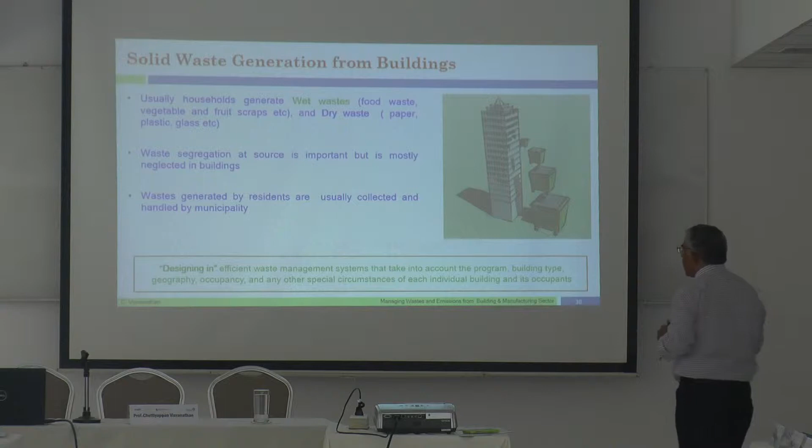Garbage, the amount of solid waste produced becomes a big issue, especially when the buildings become vertical. You need to be careful how you segregate the waste, which are done as wet and dry waste approaches. Please understand, any solid waste management system, if you want to address the issues,

the heart of the system is the segregation. That means you need to segregate in your building, and the way you do it differs from the types of buildings.

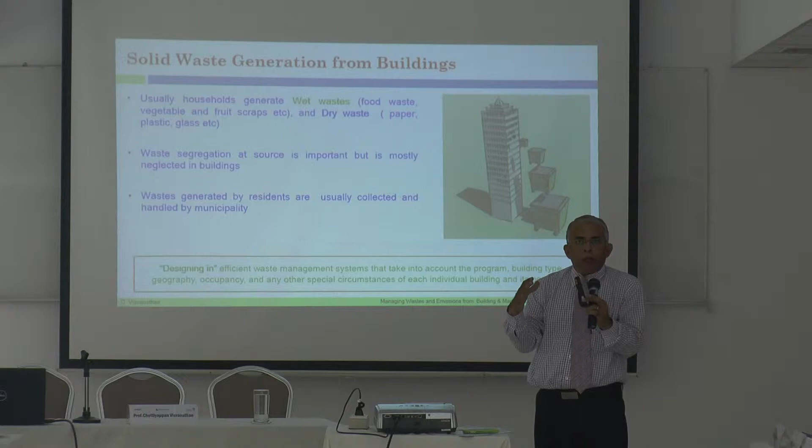It's much easier if you have a lot of space in a big apartment or a big house. But when the apartment size becomes smaller and smaller, how do you do the segregation? That has to be looked into very carefully. That is what we call designing in effective and efficient management system.

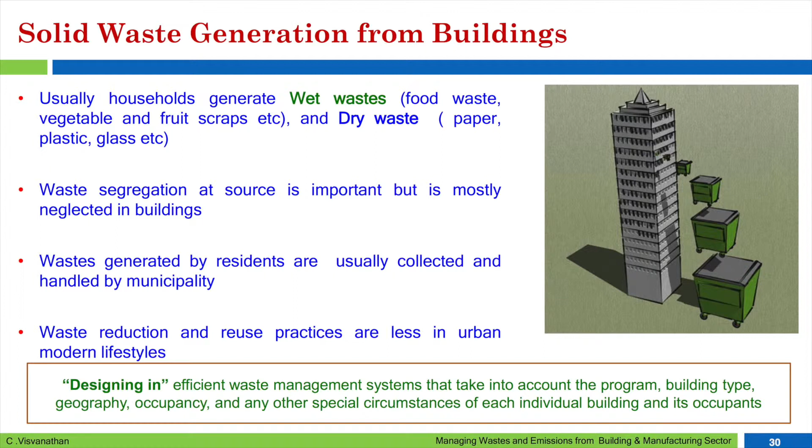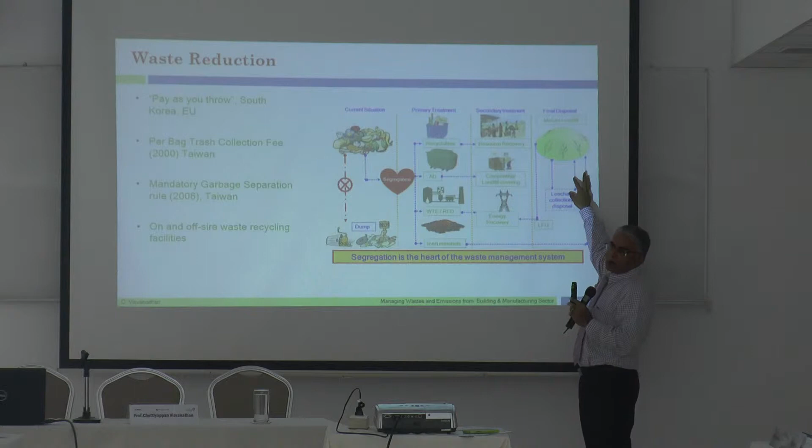It needs to take into account the program, the building type, where it's located, what is the occupancy, and all these things have to be looked into very carefully in designing it. Any system you're going to use for treatment of solid waste, the heart of the system is the segregation.

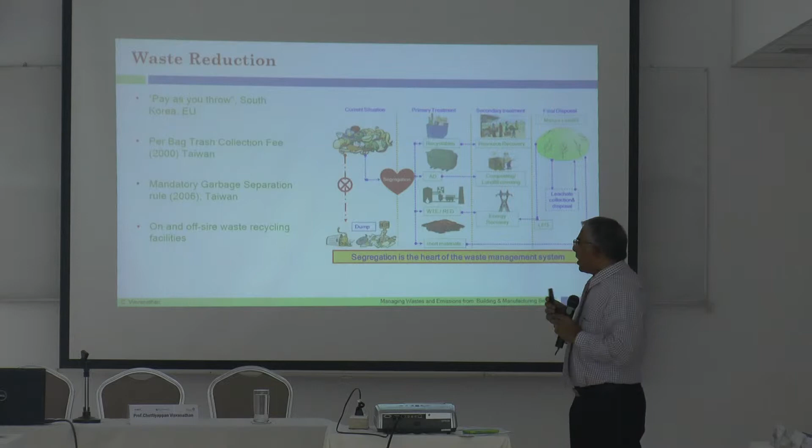The segregation has to happen at the building site. You need to plan right in the beginning. But there are a lot of successful case studies. Sorry, I don't have time. Maybe later on, if you have time, we can discuss a little bit about it.

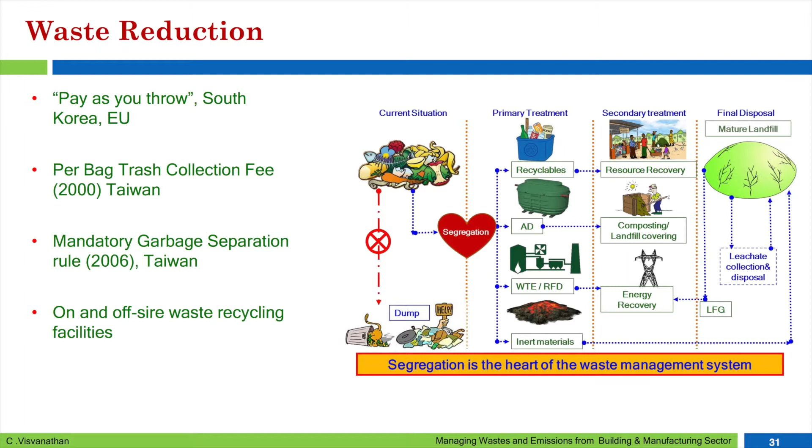Let's say, for example, South Korea and the European Union have introduced pay-as-you-throw. That means however much waste you are generating, you pay for that. That means you start with a segregated system at the apartment, at the building level.

Per bag trash collection in Taiwan, same type of system. You pay based on the amount of waste you generate. That means again you need to sort of segregate your waste now.

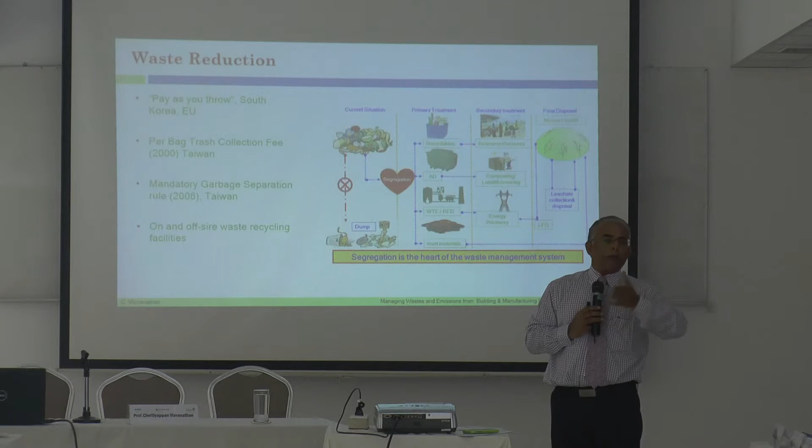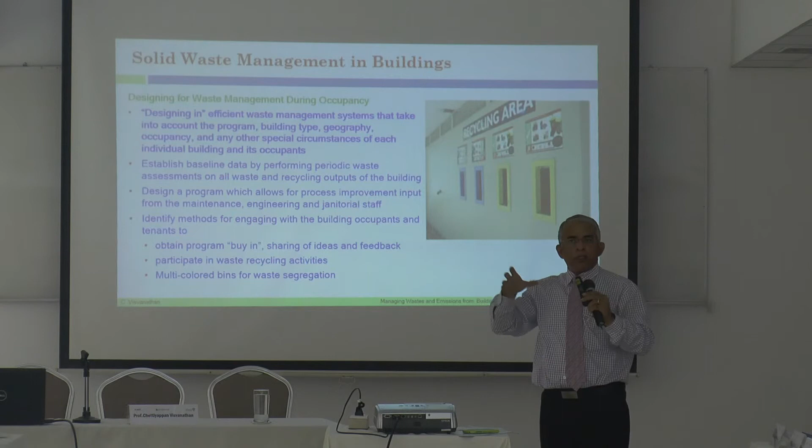Most important thing, when you do segregation, what do you do? You segregate your bottles, segregate your tins, but you need to have a facility to dispose of them. So all these things become part of today's building design code. It has to be.

And I think I'll finish off with this. It's very important to understand what type of recycling activities you have, and the different types of waste segregation bins.